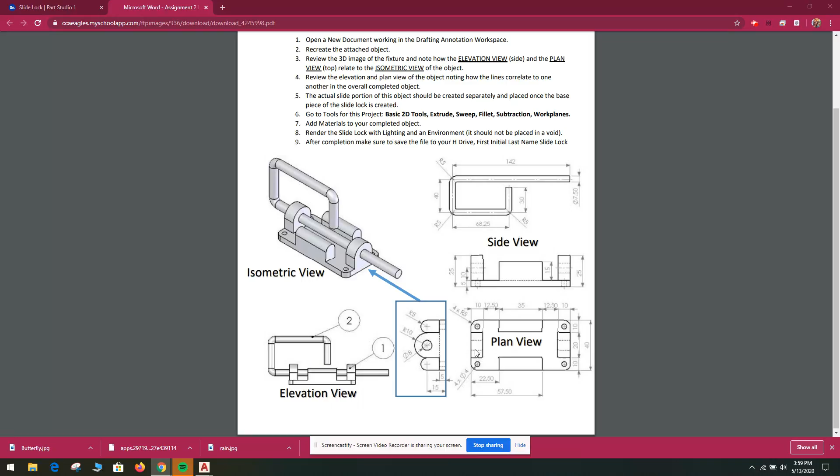Okay, so first thing we're going to do is make a rectangular base plate. So let's do a new one so you can see it from the beginning. Okay, and we're going to call this slide lock.

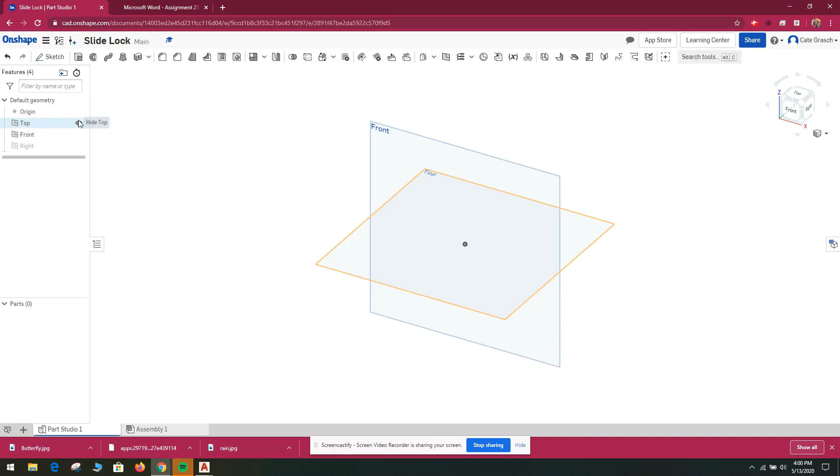So once that loads, we're going to decide on which face we want, and this time I'm just going to use the front. So I'm going to turn everything off but the front, and turn it to the front. I'm going to zoom out a bit because it's going to be a lot bigger than it looks right now.

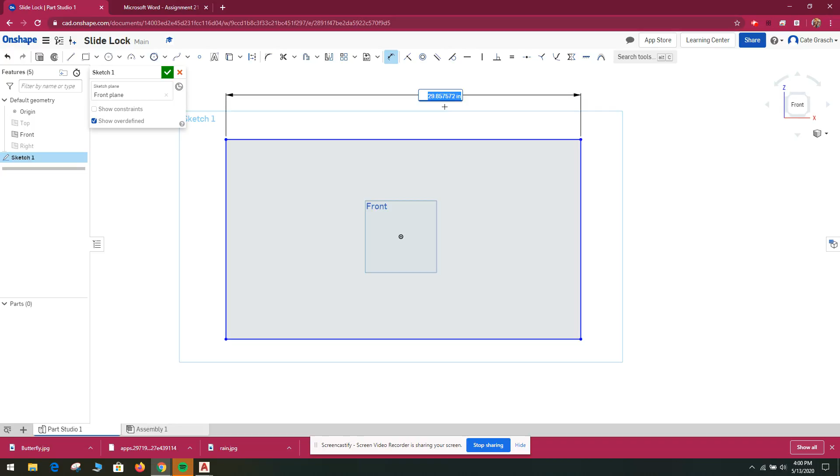So I'm going to select the front, and then change my sides here to 80, enter. So we got to zoom out. And this one's going to be 40, enter.

Okay, then the next thing we need to do, if you look at this, is that you have these little radiuses and you have these circles. They're through, okay, because this would be attached to a door or a gate or something. So first thing we'll do is the radius.

Okay, so that's pretty simple. You'll come and get this sketch and select your two lines. It'll automatically give you a radius. You can double click on that if it's not the right number. It's supposed to be 5, enter.

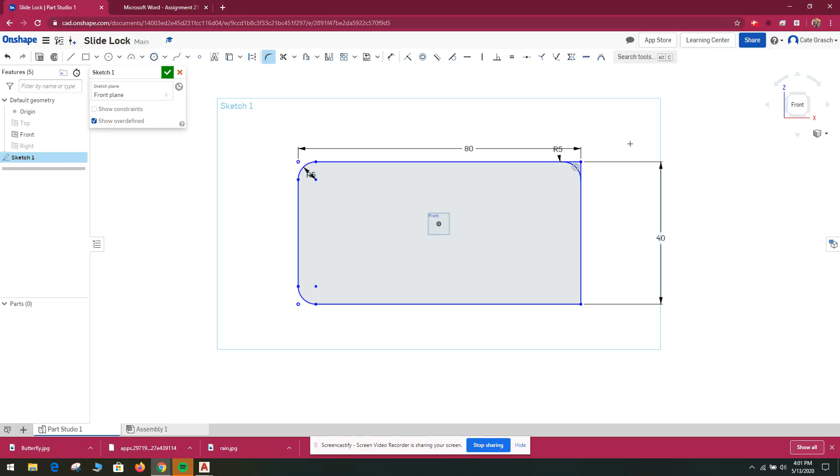And then you'll have the same thing down here. It'll automatically do it. Just press enter, click your two lines. It'll say the radius that you're giving it, and enter.

Okay. Now, because you have that center point of that radius, you can put your circles in pretty easily. So just draw them out, each one. Okay. And then, oh, not that big. Didn't click. I did click you there.

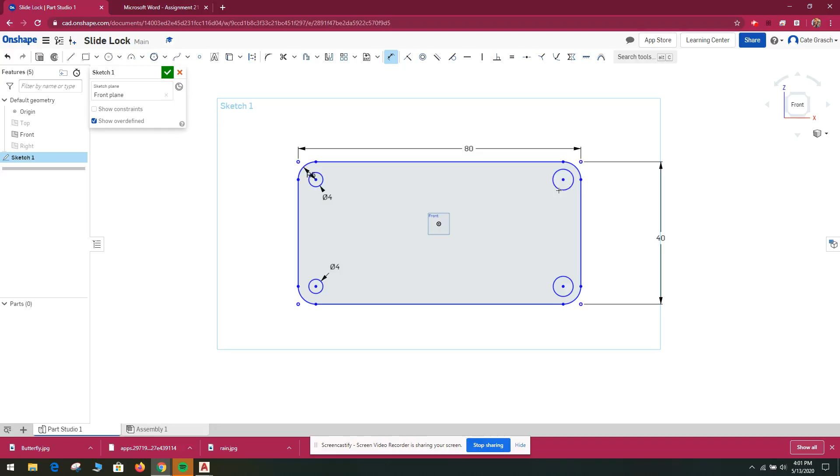Okay, so now we can just make all of these the right size. 4. Select 4. In here. Okay, I'm just trying to be quick about it.

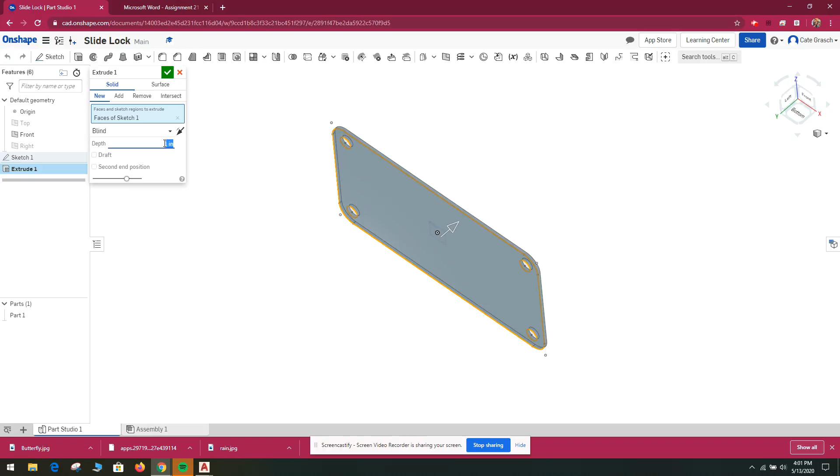Okay, so now I have this base plate and I want to go ahead and just extrude it. Okay, and it'll automatically pick a side, usually up, but we don't want it to be 1, we want it to be 5. Okay, so that looks pretty good. I'm going to say okay, my extrude looks good.

So now I'm going to go back to the front again. And on this, I am going to do a sketch. I want it to be on the top plate of this. And I'm going to do center lines on this, across this plate.

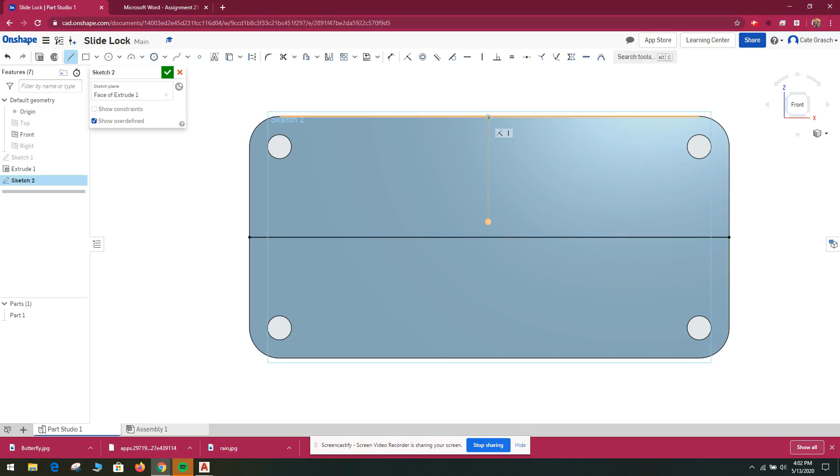Oops, that's not where I want it. I want it right there. And then I'm going to do another one here, all the way down to here. Okay, there's your center. Now what we can do is select this line and say sure, enter 17.5.

And then I'm going to offset it again to the other side and I'll show you. Good, 17.5. Oh, no. Offset this one in that direction, enter 17.5. I didn't look up, so not this direction. Gosh darn it, I got a lot of lines over here that I'm not happy with.

I've got to go back. Some of those extra lines over here. And I'm not annoyed, okay. I'm not sure why it's being difficult. So if I did this and I select that, I should be able to say enter and say 17.5. Thank you, finally did it. Okay, I'm happy with that.

Offset again, and this one I'm going to press enter and say 10. And then I'm going to offset the whole line, offset back on. And I want it to go the other direction this time, enter, and it's going to go 10. Okay, so now I've got this grid.

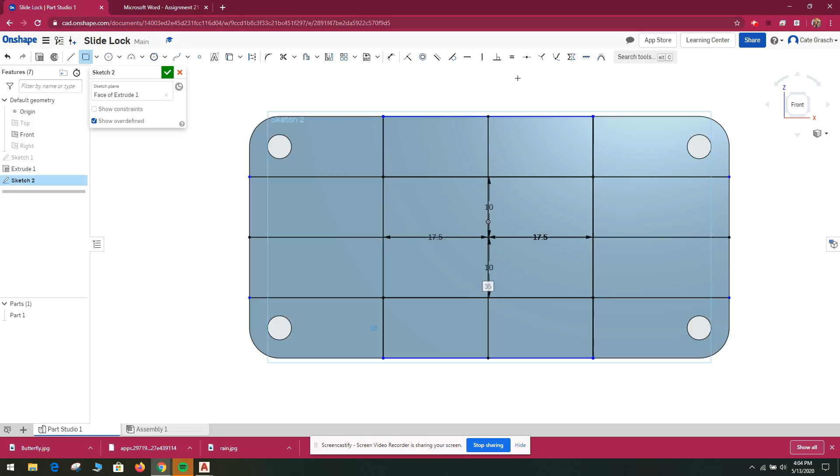And the reason I did that is because I want these to be 20, and I want this to be 35. So 17.5 is half, and I had a center line, okay, of 35, and the same here. So now I can easily put in some of my rectangles. So 1, 2. Okay, now I've got these, these are my 2 rectangles here.

Hopefully they place themselves correctly without showing up, which makes me a bit concerned, but we'll figure that out in a minute. The next one I want to offset would be over here, and I want it to go in that direction, 10 over.

And then the same thing with this guy, other direction, enter 10. Okay, and I should be able to make a rectangle. Oh, I see what happened over here. And then I'll make a rectangle.

Sometimes I forget, and maybe you do too, that I can't just assume it's doing what I want it to do. Click and drag your rectangles. That's better. Click and drag.

Okay, so see the blue? Keeps getting hidden. But I should be able to turn off my tools. Some of these lines I don't need. If it's a full length line, you should be able to just highlight it and delete it, instead of using the trim tool. That way it'll go quicker for you.

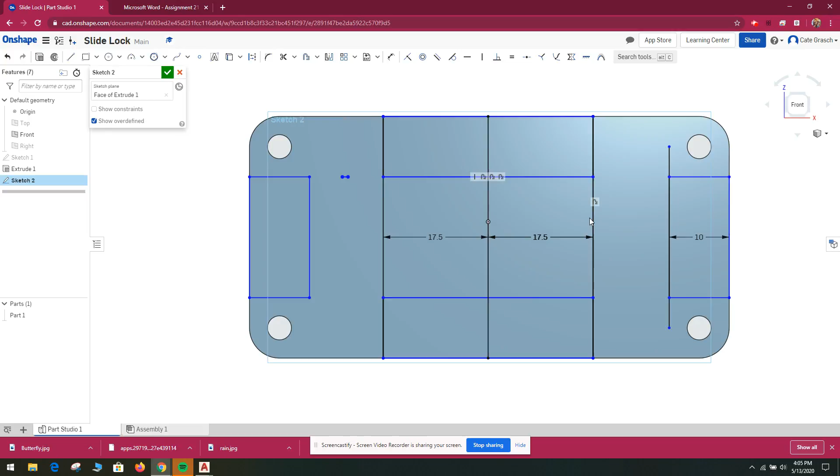Okay, and we put in rectangles, so okay, now I have these. Oh, this doesn't need to exist. Okay, can go away. That goes away.

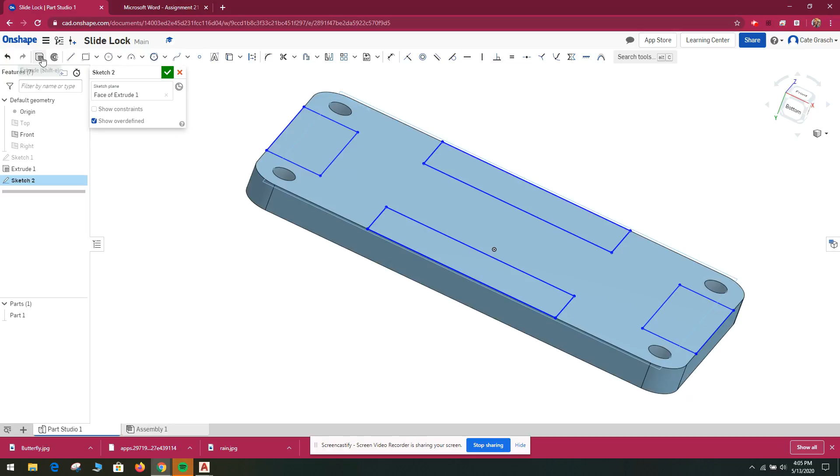Okay, so now let's look at it like this. Okay, so I want to do an extrude, and I'm actually going to just extrude all of those. And let's do 15. Oh, I didn't do this one. 15. Okay, good, and I'm happy with that. I'm going to leave it.

That's my first extrude. And you see, the one thing you have to be careful of with this program is that it integrates completely when you do it.

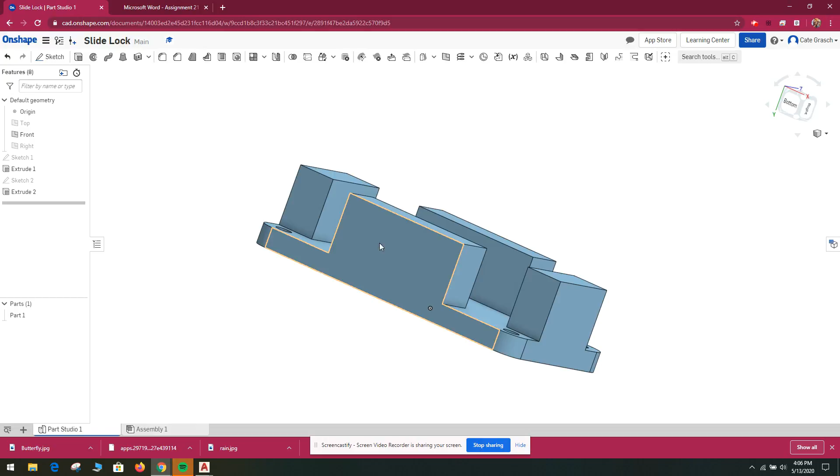So now what I need to realize is, let me see if I can just do a face extrude on this, which I think I can if I do both of these. Yeah, and I want that to go up an extra 5. Okay, enter. Okay, perfect. Okay, now what I'm going to do is I want to round these corners out.

So if you look at it from this side here, the big one has a radius of 10 and the small has a radius of 5. It basically ends up making this a half circle. So I'm going to come in here and I'm going to select my edge only.

It's going to give me a teeny radius, but I don't want that. I want 10. Just select it, enter. It should happen for you. And then it won't default. Whoops, if it doesn't keep it on, then it didn't default.

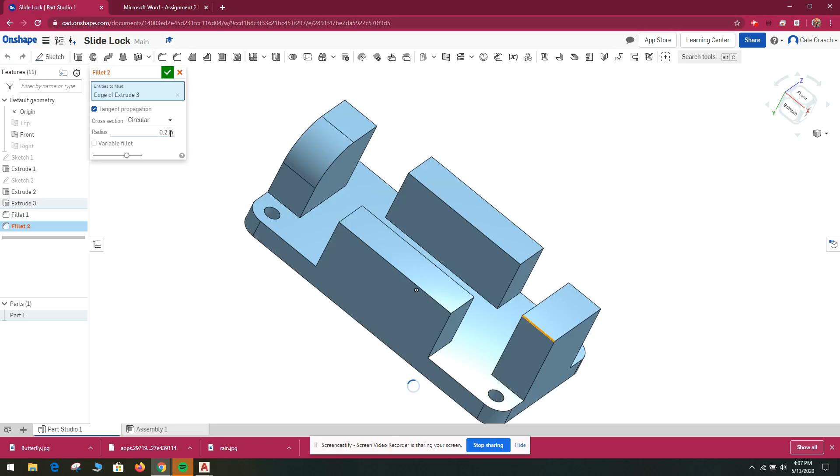Sometimes it just does weird things on its own. I'm sure it's not completely weird on its own, it's just not doing what I want it to. So I'm just going to call it weird.

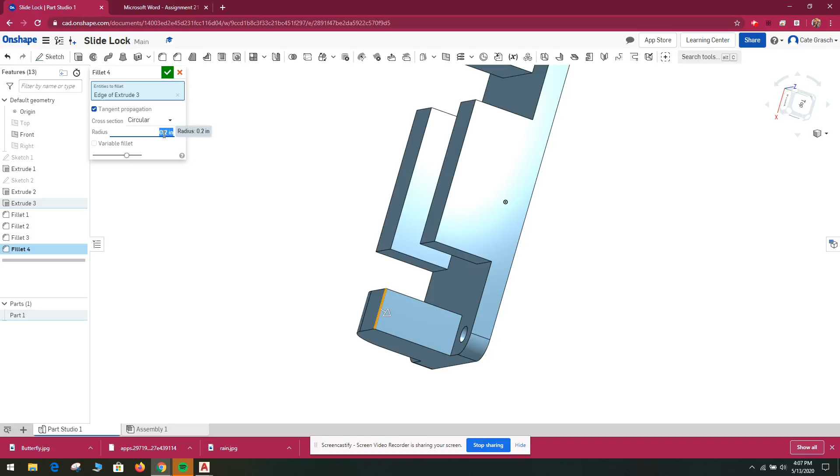So now I'm going to do the same thing here. I want a 10, and I'm going to enter. Okay, good. And the same detail with the fillet tool on this one - make sure you decide on the radius, and press 10.

Now remember, I wanted these to be 5. So I'm going to hit this. I believe I can just do all 4 of them at the same time, and that would make my life a lot easier. All of them, I want to have 5. And voila, there they are.

Okay, so now we have this. Okay, so if you look at it, we're getting there, right? The last thing I need is to get this circle cut out.

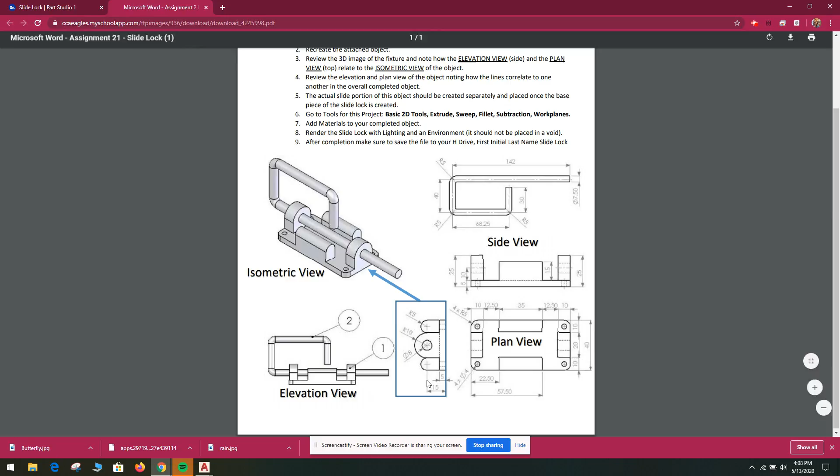Okay, so what we have to realize about that is, if you look here on this side, the center point of all these circles is up 15. So if it's up 15, that means the center point of your circle is 15 from the bottom. So the other thing we need to realize is that I'm going to sketch on this face.

We should be able to use the center point of the arc, which is nice. And we want to make sure this circle is 8 - okay, that's the diameter we want. So then we're going to extrude it.

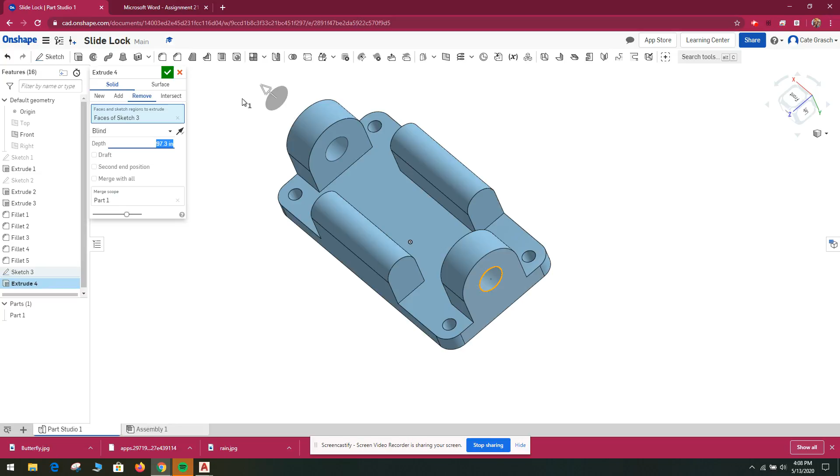Now, what you have to remember to do is say remove, because you're going to make a hole. And you should be able to drag this little guy all the way through, like the press pull tool almost, so you can get your arrow and drag it all the way through. If you had a specific depth you needed, you would need to put in the number, okay? And press enter, and now you should have your full base plate, okay?

So that's all it is to the base plate. And so once you have that, we can start working on the other. So I hope that helps.